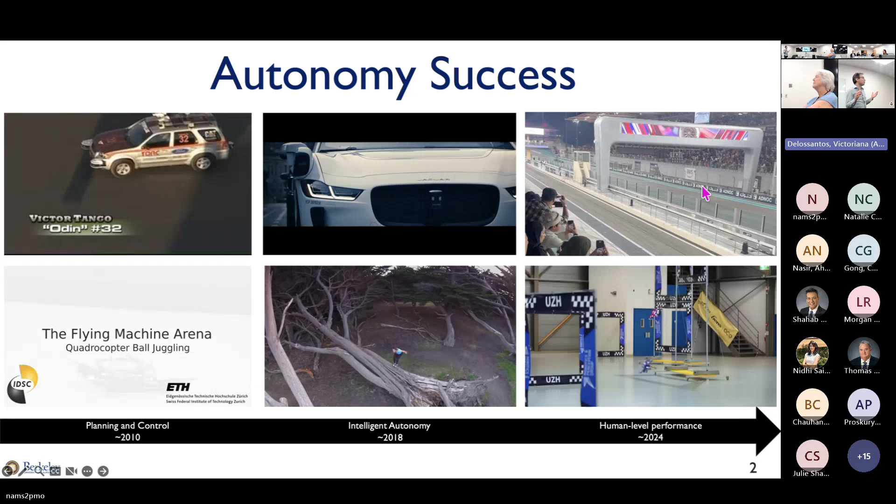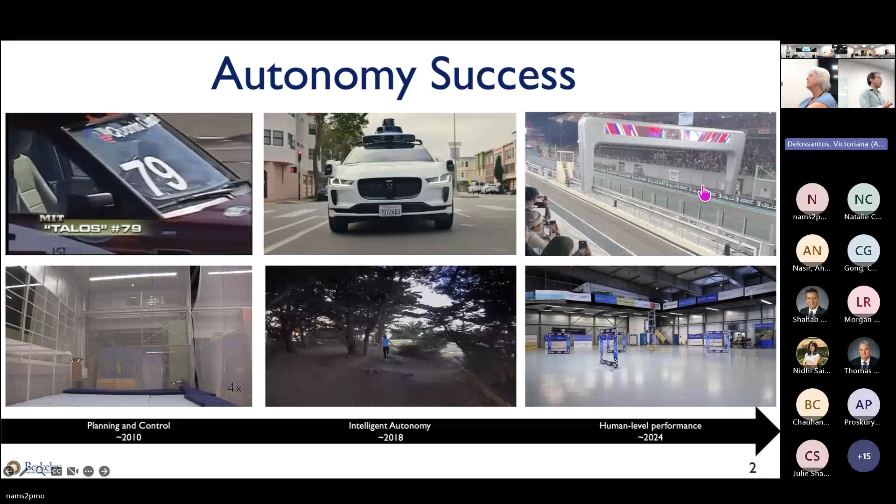There has been tremendous success in terms of autonomy in robotics and even beyond. If you think about 2010, people were working mainly on problems related to planning and control in well-known environments, like motion capture systems or simple racetracks for autonomous driving. Then in 2018, we entered the era I call intelligent autonomy, where we started to bring autonomous devices into the field - amazing videos from Skydio, for example, and also from Waymo in terms of autonomous driving.

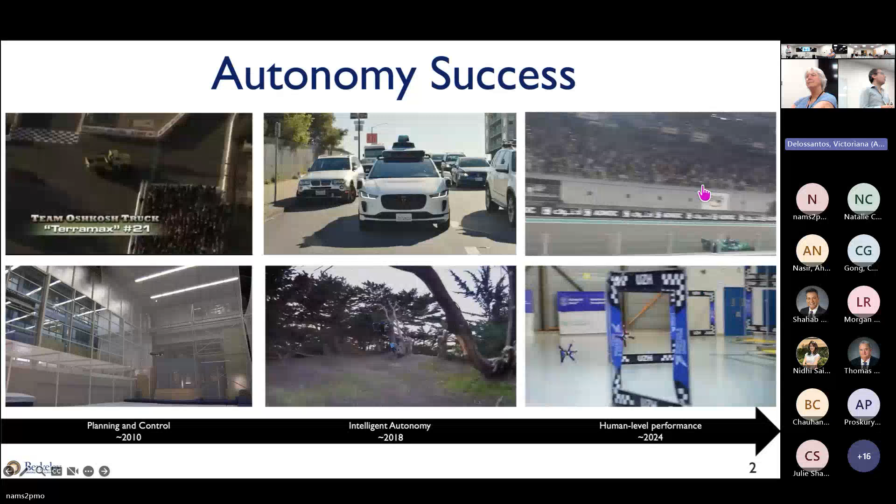Recently, I think from 2024 onward, it's the era I call human level performance. We really want to reach the next level of autonomy and how the human is behaving and thinking. There has been lots of focus on racing - can we push the limit of this platform? And you can see the trend is very similar, both in ground mobility and aerial mobility.

So really what we're interested in, in my lab, is to build devices which are unmanned, small, agile, resilient, and collaborative. We believe this will be beneficial for several applications related to national security, search and rescue, agriculture - which is in need of tremendous manpower - autonomous delivery, and more generally smart transportation. We really see this autonomous system interconnected within a city-like environment with cars and other autonomous devices.

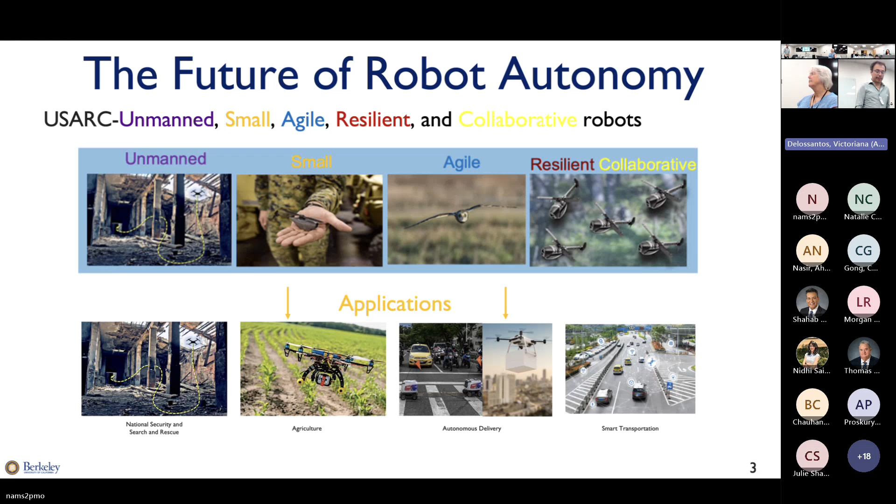There has been lots of progress, as I mentioned, in autonomy, but at the same time we're still far from reliable solutions. For example, small failure of a propeller can generate catastrophic effects. Even in the DARPA sub-T challenge, you've probably seen that robots are still quite slow in this kind of environment.

This problem exponentially becomes even worse when you scale the number of vehicles. If you have multiple agents in the environment - and we've seen this in autonomous racing or self-driving cars - basically the entire infrastructure sort of collapses.

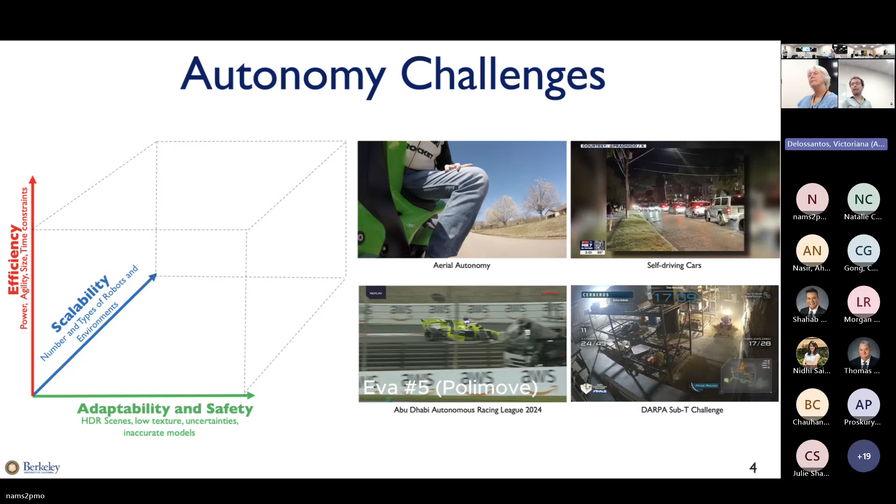So really the challenges that need to be resolved are in terms of efficiency - how do we make our algorithms power efficient, agile, and working on size-limited, computationally constrained platforms?

How do we increase adaptability and safety - for example, in HDR scenes, low texture, inaccurate models of the environment - and most importantly, how do we scale the numbers and types of robots in the environment? Many people have been focusing on one of each axis or trying to maximize the performance of one axis, but really the goal is to design a system that maximizes all three axes: adaptability and safety, scalability, and efficiency.

When we look at the design of autonomous systems, there are mainly two ways of enabling autonomous robots to perform in a known environment. One is conventional autonomy, which relies on a classic sequential paradigm: the robot localizes itself in the environment, creates a map of the environment, then makes a plan in that map, and then sends control commands to the platform.

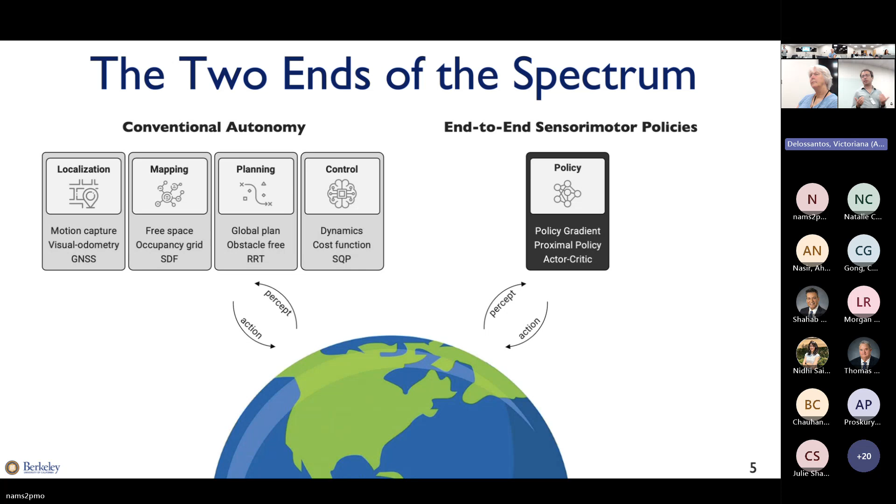On the other hand, we have what we call end-to-end sensorimotor policies. These are basically neural network approximators that generate, from a given sensory input, directly the commands to the robot, and you can train them using different approaches such as imitation learning, reinforcement learning, and so on. So which one is better and which one is preferable? I would say both of them have their strengths and limitations.

So on one hand, if you see the localization, mapping, planning, and control, it certainly enables collaborative design. You have multiple people working on different sub-problems, and then they come together and merge their results. It's modular and interpretable, but it's very sensitive to errors in one of these modules, and those errors compound as soon as you go from one module to another. And another problem is that this is slow in terms of computation.

What I call multi-level abstraction synthesis means that the same information is actually used at different levels of abstraction. If you think about mapping, you need a mapping for obstacle avoidance, but the same mapping is not good for localization. So you need another type of mapping, but at the end of the day this is still the same information, just at different levels of granularity.

On the other hand, with low domain expertise, it streamlines the perception to actions latency, but at the same time it could be very task specific, and it's difficult to interpret in many conditions. Both approaches have quite several limitations to scale to multi-robot systems. So the question is, how can we go beyond traditional autonomy and merge the strength of both approaches to generate efficient, adaptable, and scalable navigation.

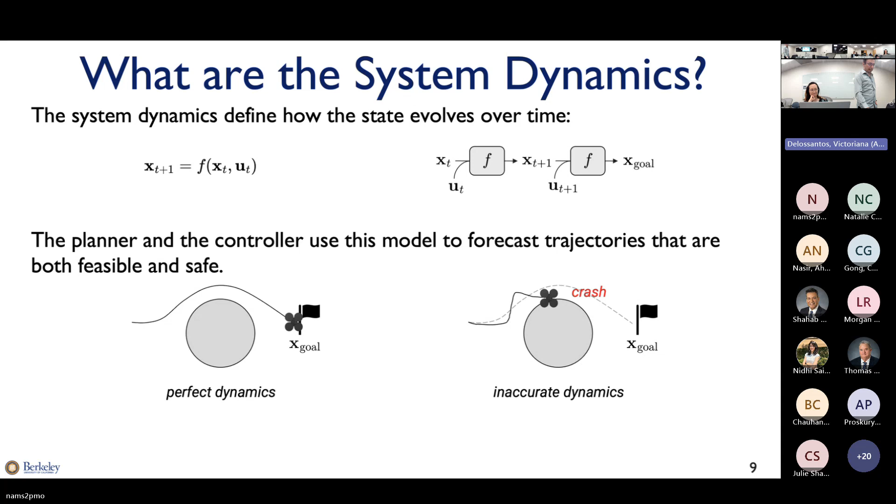The problem is that the dynamics are time varying and only partially observable, and this is typically the case. Some systems are very difficult to model - think about aerodynamics effects or vibration and all these kinds of things. Basically, first principle models can reach a given level of fidelity, but at some point they saturate, and so data could be a great complementary alternative to take into account these effects.

And how we do this in an online fashion - that's really the main challenge. So what we did in this work is that we learned the dynamics offline. This is basically a neural network where we learn these dynamics both using some physics priors and some real world data. Once we have these dynamics, we can close the classic predictive control approach on this dynamic, basically forecasting state and control input, so state trajectories overall.

The idea here is that, by comparing what you forecast in the future and what you actually obtain from your state estimator, you can continuously adapt your model by adapting your neural dynamics in an online fashion. What we did is even a little bit more, in the sense that you can even compute the uncertainties related to these neural models and use this uncertainty to bias the future prediction, and so in the way you solve the optimization of your system.

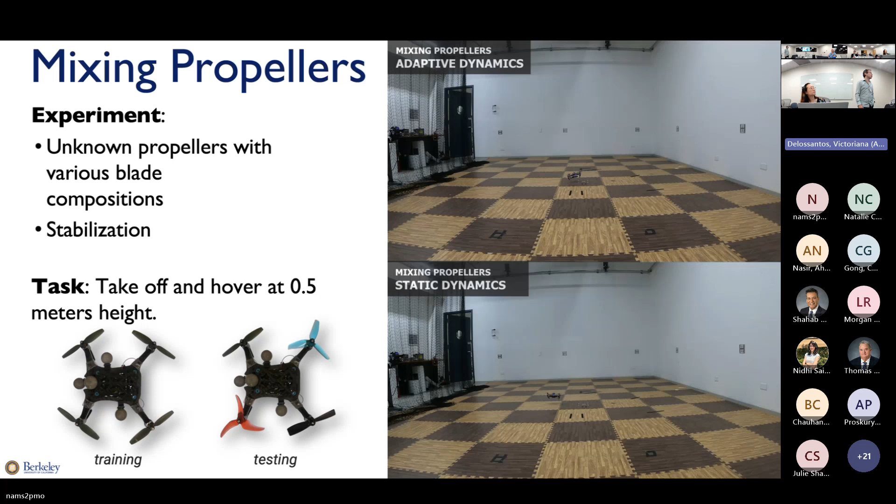The other experiments we did - how do we swap all these, we swap two propellers. So the robot has never seen these propellers - can it quickly adapt to these new conditions in the environment? And this is performing still better compared to the static or even to the adaptive control case, as shown in the paper.

So the idea is, can we try to eliminate this kind of blocks and go toward what we call a more reactive solution. Basically, the robot navigates in the environment, and based on what it's observing in the current view, it's able to steer directly into regions that are safe to avoid obstacles.

So the idea we went from this to a solution where we simply localize, and we have a control policy that enables still safety but guarantees also better agility, because you don't need to store anything compared to the old approach. Just to get to the main approach, what we did here is leverage foundation models to generate depth maps in the environment.

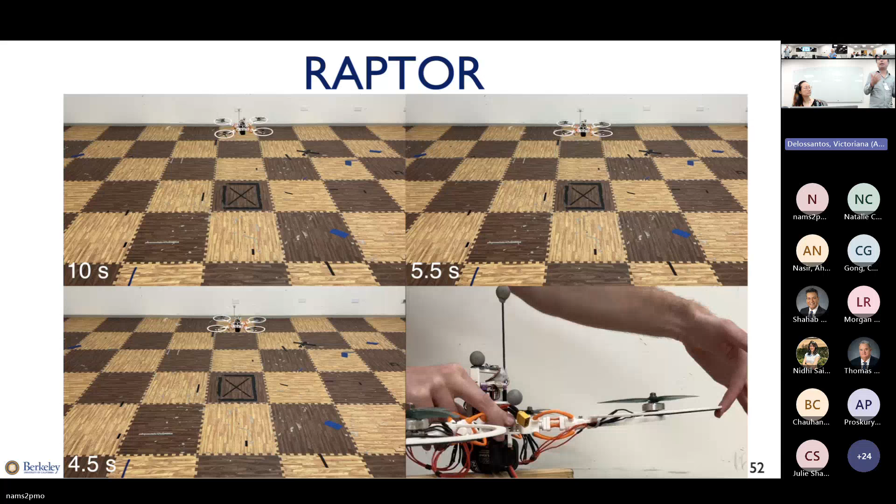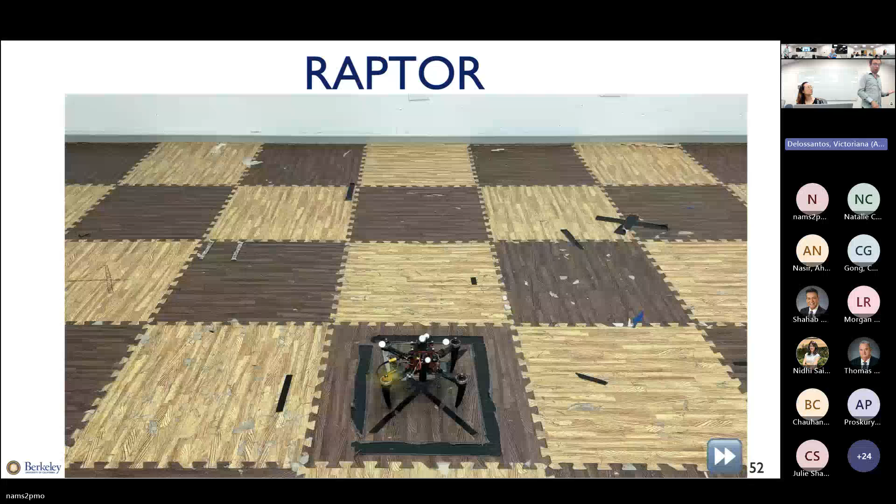The policy is learning and adapting online. Particularly impressive was when we had disturbances that go beyond 90 degrees roll and pitch, and the robot was still able to recover and adapt.

And this is completely open source, so anyone could potentially reuse it for their own project.

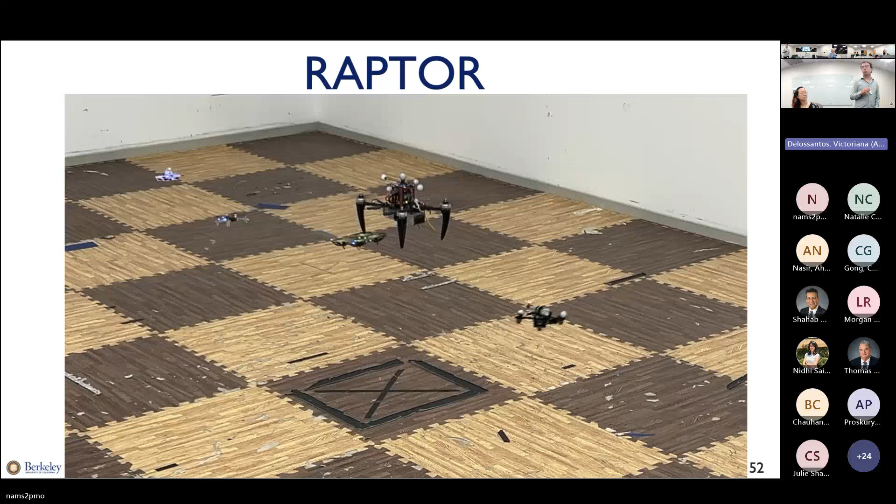So the next step is how we extend this to basically visual input, similar to what we've done in the other case. So you get visual input—can you get your policy rather than from state information directly from visual observation? That's what we are aiming to achieve.

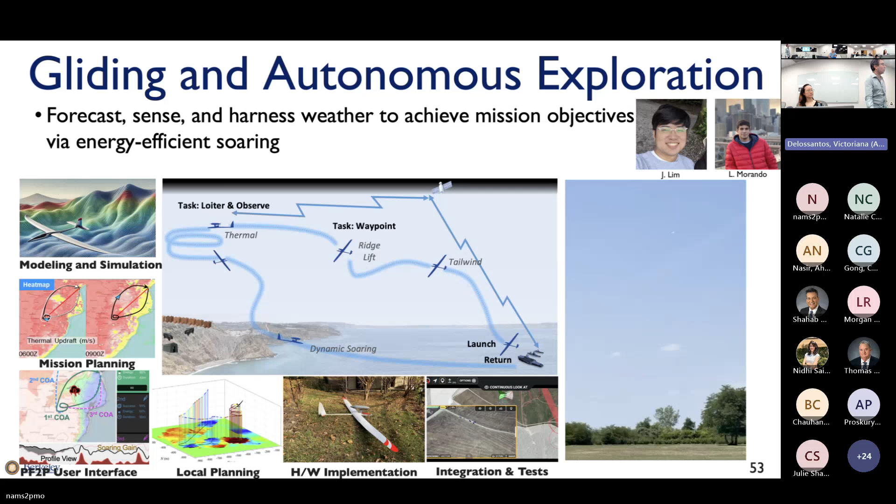We're also trying to extend this concept to fixed wing. We're doing lots of work related to improving energy harvesting from the environment, mainly through soaring capabilities. We're really interested in using model predictive control, but also learning-based frameworks, to enhance the capability of this system. This is an active project we're actually working on with the government.

Another area that could be very interesting, especially for fixed wing, is that it's very hard to do reactive collision avoidance—or you can have it, but it should be complementary to long range navigation. In the case of long range navigation, you need a localization system that is beyond GPS.

So what we're doing here is a lot of thermal geolocalization. We use either RGB or thermal information and match it with satellite data to enable global localization, even without GPS. This has been tested in a wide range of environments, including desert-like scenes, which are very self-similar. If you're interested in this area, we have software that's been released that you're welcome to use.

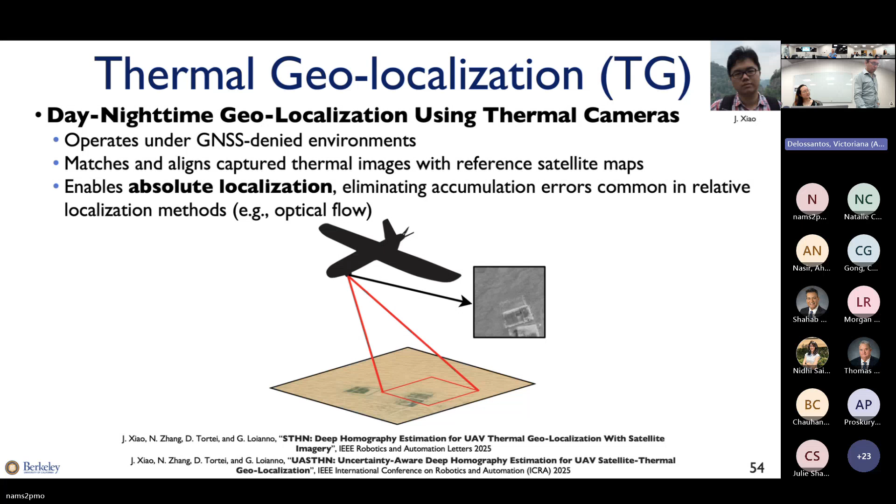In the last part of the talk, I'll discuss how we extend these models and representations to multi-agent systems—where does it make sense, what do we share, and how does this improve your overall mission?

We're really interested in seamless algorithms that are able to collect, in a seamless manner, and fuse intermittent distributed data for accurate and resilient context-aware decision making.

In this case, we're interested in two main problems. One is the planning problem under limited communication constraints, and the other is how do we collaborate in terms of perception capabilities between multiple agents.

To give you a quick understanding of how this works, imagine we have a network of robots. Each robot has its own sensor input—for example, in the case of collaborative perception, it's an image. In the case of a control policy, it might be an image or might be the state of the robot, whatever you like. But in this case, we assume it's an image.

In terms of output, you would like, for example, to have depth estimation from each robot's viewpoint, or semantic segmentation, or other types of high-level perceptual information that could be useful for robot reasoning.

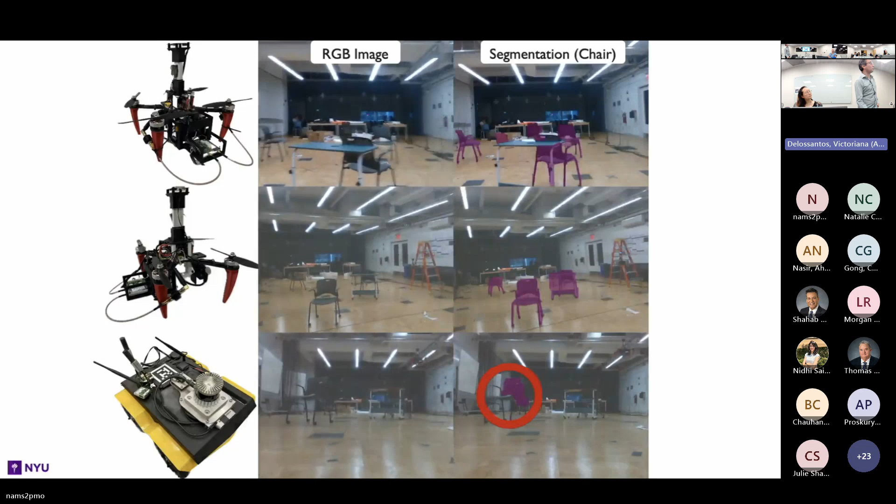That's one way to see the benefit of this collaborative approach. The other benefit, for example, if you have occlusions, like in this case, the chair is occluded by a table, the collaborative perception enabled the detection of the chair from the ground robot viewpoint. But this is a framework that you can use also for collaborative planning and control.

And this has been a big project where we have also tried to release a dataset in the wild, because there is lots of data for autonomous driving, but the context of robotics is very different. You have multiple types of mobility, you have multimodal sensing, and so how do you handle that? We released this dataset with 4 robots, a mix of aerial and ground robots.

But if you share information with a different agent, at least the robot is able to partially reconstruct the view of the environment and reconstruct the depth of the environment. So it's sort of helping in the reconstruction process.

Similarly, we are interested in the multi-robot planning problem, similar approach, but under limited communication. And here we use a hybrid solution. So we use the same neural network structure to have multiple agents collaborating with each other, and that guarantees scalability in terms of number of agents, and then we couple that with model predictive control with a second order control barrier function to guarantee safe navigation and obstacle avoidance.

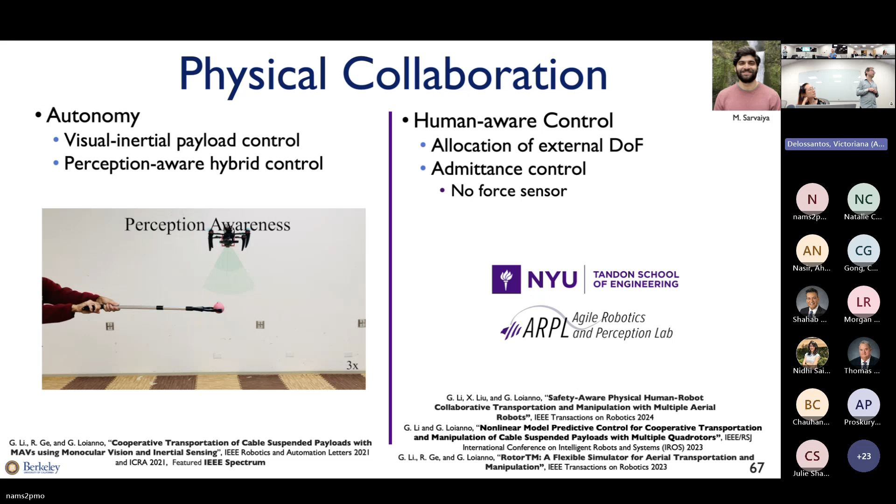So the idea here is that the structure is completely compliant to the user interactions, and we're also able to estimate the user forces without any force sensors on the structure, just by looking at the motor values of the vehicle. And the other great thing is that this system has some redundancy, so you can basically move the robot to achieve, for example, safety or other types of tasks, without penalizing the trajectory of the load or the interactions from the human.

So a few takeaways: agile and robust flight emerges when autonomy is adaptive, reactive, and grounded in what the robot can observe. I've shown how models and representations can be exploited for safe, adaptable, and scalable navigation. Physics knowledge is certainly beneficial, especially when we learn these models. And collaboration definitely improves resilience to failure and mitigates adversarial attack.

So, of course, there are several limitations. If you think about the robot autonomy framework we've shown, it has only local safety guarantees. It has not yet semantic reasoning. So potentially, you can combine this with visual language models.

In terms of collective intelligence, right now the framework is mainly task and robot dependent. We also showed only homogeneous types of sensors, in the sense they have only cameras. What we're really interested in, and working on, is multimodal sensors, so the ground robot has a LiDAR and the aerial robot has a camera. Can you do the same task with this diversity of information, with information that complements each other? That's the overall idea.

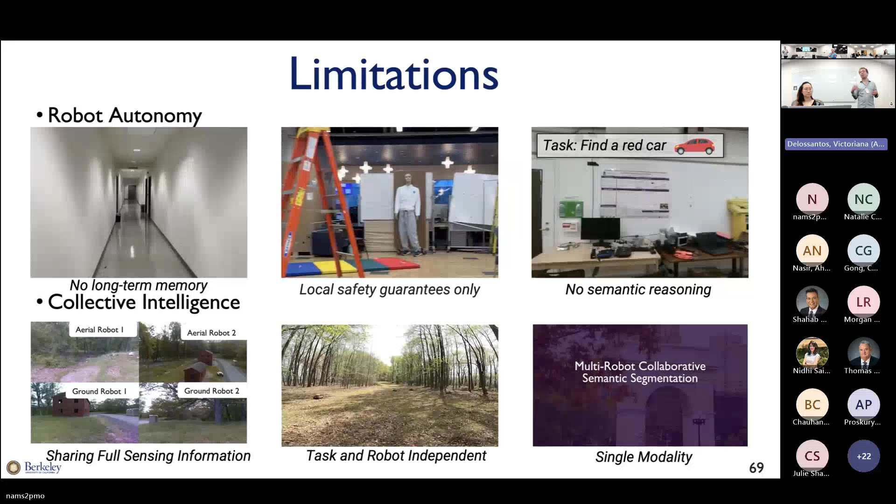Can you share just relevant information? Right now we mainly share the full image, but the reality is that you can share information based on the type of task you have, but also on the type of mobility that the robot provides. If you are a ground robot and you are an aerial robot, the information you want to share might be different just because you are moving differently. So your range of actions potentially affects the type of information that is beneficial to your neighbor. There's a lot to understand in this area.

To give you more ground on what we're currently working on, we're very interested in world models. For example, for the first part where we learn dynamics, we would like to learn latent representations of the system and directly plan and control in the latent space. This would enable us to further scale down computation, compress information, and give real context to the robot.

You can imagine you have a view of the scene and you want to navigate just using images to get to a goal. The idea would be that you no longer estimate future states, but your future state is literally the image. So what you're going to forecast is future images. We already have some results on that as well, but that's a very exciting direction, especially regarding how you then guarantee safety, and what's the relationship between motion in the latent space and motion in 3D.

And then how do you extend this to a multi-agent system? The way I see it, each one of these agents is basically a neural agent. This neural agent can either have a representation, using one coming from the specific task you're trying to solve, or it has basically a model like the one on top. You can imagine that each one of these world models is within one of the agents.

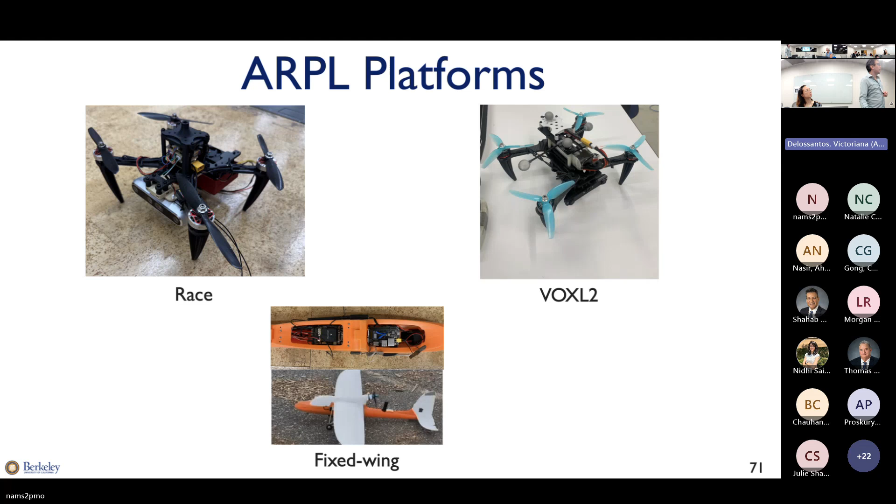Also, the platform we use is mostly built by us with custom components. We do everything in the lab—well, we buy components, but we assemble everything ourselves. And we also have a new flying space that I invite you to visit. It's very nice, in Berkeley, with 30 Vicon cameras, and we have lots of outdoor space.

I want to thank you all, the students and sponsors, and I'm happy to take questions. Thank you.

Yes, should I stop sharing? Okay. Are there questions online? Maybe there's something in the chat. Oh, we're set up, I can go.

Yeah, please. Yeah, it's more like a comment. Very nice talk, very impressive, I really enjoyed listening to it. I just want to say that I'm working on a project called ACERO. The project is looking at how we can bring advanced capability into wildfire response, especially UAS.

Right now we share the full compressed image, the latent representation of the image. But is it really useful to share the full latent representation? Probably not, because if your task is just to do object detection, maybe you want to share only information that's already relevant to your task.